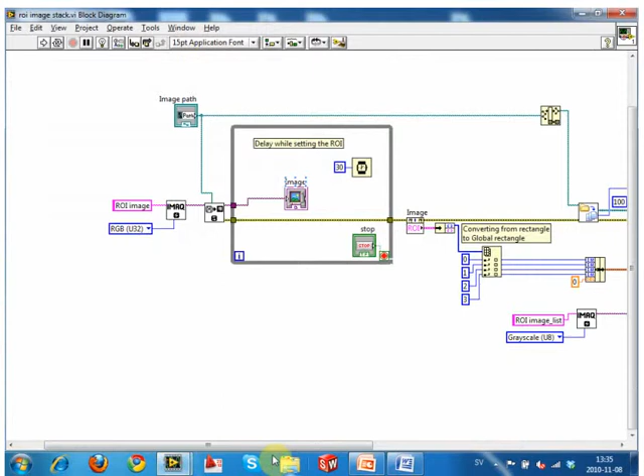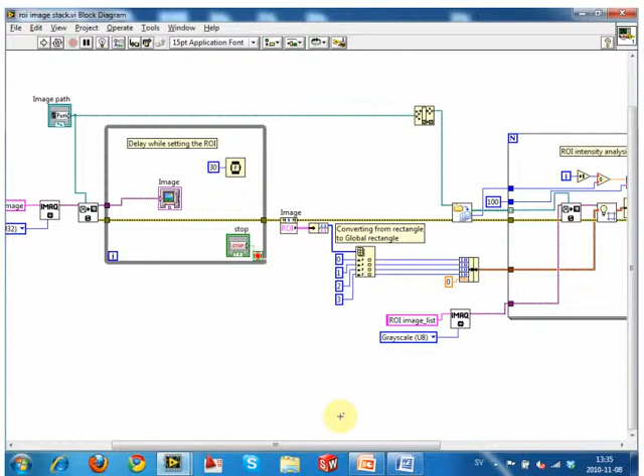So if we go into the block diagram, it's fairly straightforward. If we make reference to the block diagram from the handout, you see there's a few differences. The one in the handout was for image preloader, which is a little bit more advanced, and what we're going to work on today is the ROI one that was written in this particular section.

So, to start off with, we can straight away make two changes that are very important. One is this one - we're using this old, busted kind of VI, and we don't want to use that. We want to put in the one that we wrote, the one which does all the sorting for us and takes care of all these issues.

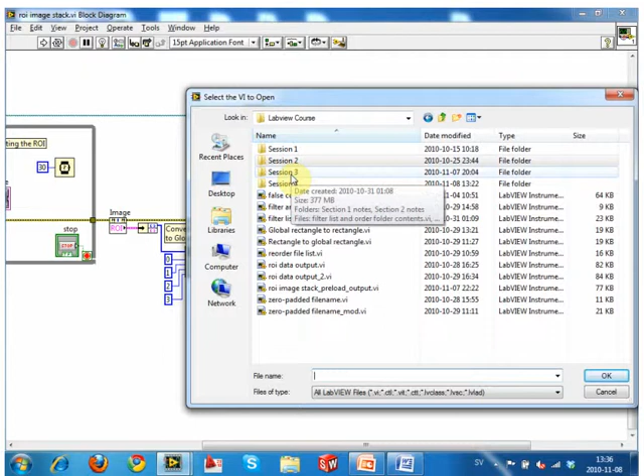So the way that we do that is we right-click on here, and we go to Select a VI, and then we want to choose the VI that we want to put in. And for assistance, I put them all in a folder called sub-VIs in session 4.

Sorry, it's okay, I missed a lot of lectures. Do you think I can keep up? Sure, you can just watch and see how it's going.

Okay, so then we need this filter list and order folder contents. That shows up on our diagram, and we want to just replace it for this one.

So we have the file path in, file path out, just like there is here. There's the error in. We also have this filter pattern, so we want to put that on the front panel as well, so that we can choose the JPEGs instead of just letting it run.

Can you tell me with one sentence what you are doing? So essentially, we're taking something we did from session 2 and making it more complex. We're building on something we've previously done and giving it more features like file outputs, and we're also going to introduce more sub-VIs to make things work a little bit better.

Okay, so we want to feed this through, so we can grab our wire, connect the input path, delete the old one, and put our ordered path into this one. Same thing with the error lines - we can flow the error lines through here too.

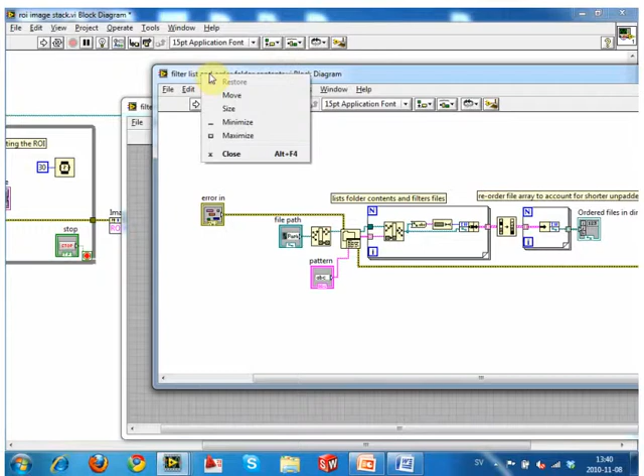So we've now replaced it with this VI that we wrote, which, if we open it up quickly, you'll remember we're taking the folder contents and reworking them. We're doing this little switcheroo to convert between old Windows format ordered files and files formatted the way that we want them.

So we've replaced that one. You'll also notice this thing, and I've mentioned previously that we convert types of rectangles from global rectangle to rectangle very regularly. It's something you kind of have to do when you deal with regions of interest. So we actually have a sub VI for that.

So if we drop another sub VI, right click and go to select a VI, and then go to global rectangle to rectangle, and then hit OK, then you should have this one. So this is actually written wrong—this is me writing it wrong. This is actually rectangle to global rectangle. Oh, global rectangle to rectangle, I apologize.

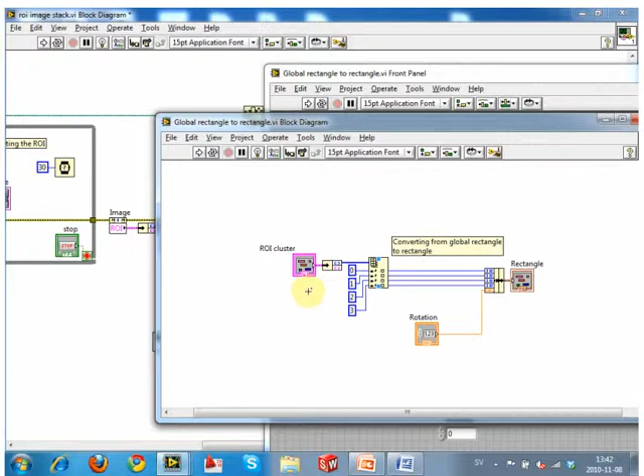Okay, so this is just for our own visualization issues. But what we're doing here is, if we double click, we'll see exactly what's within this sub VI. It's nothing more complex than what's already written on the screen, other than we have no need to write this every single time we want to call it—it's a common function. So that's why I put it in a little sub VI that we can just use whenever we need to do these regions of interest.

Why this time do you have rotation? So if we look over here, it always requires this rotation parameter. We can't get away with that, so we always have to input it. And the reason why it's not set to 0 in the back is just in case you have an example where you want to rotate it. And you don't have to edit the sub VI to put a rotation angle.

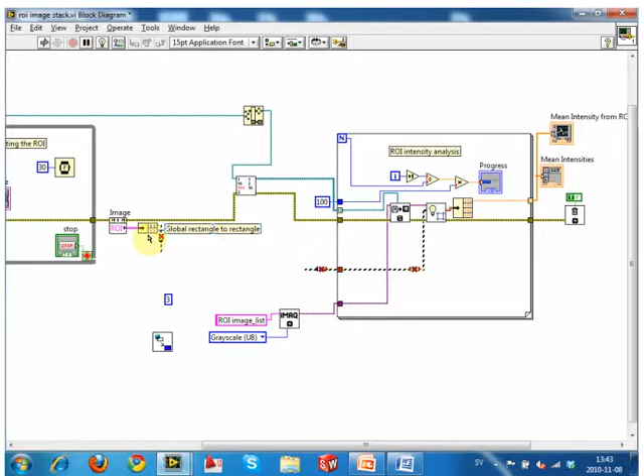So we can trash all of this now. We can just go ahead and bin all of this, because we have it all here. In fact, I'm going to get rid of all the broken lines. What was the control? Control B. So get rid of all that stuff.

So now what we're going to do is feed this wire, and it should even highlight, and it should be set. I've set these to the right names, so it says ROI cluster—that's what you feed in, and then you feed out the rectangle, and then we connect that to the rectangle of the light bulb.

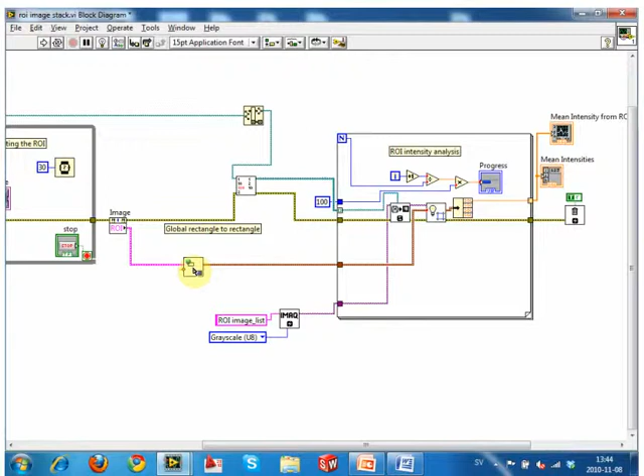Okay, but now, how do you choose the region of interest in the first place? No, this is all just switching numbers. You're choosing the region of interest actually on the image, so in here.

So once we have that, we have to put this rotational parameter too. So if you just right click when you've got it highlighted, go to create constant, and it'll default to 0 because that's what I set it to. And that's all we need to do. Now we've just replaced that whole pile of lines with this because it's nicer.

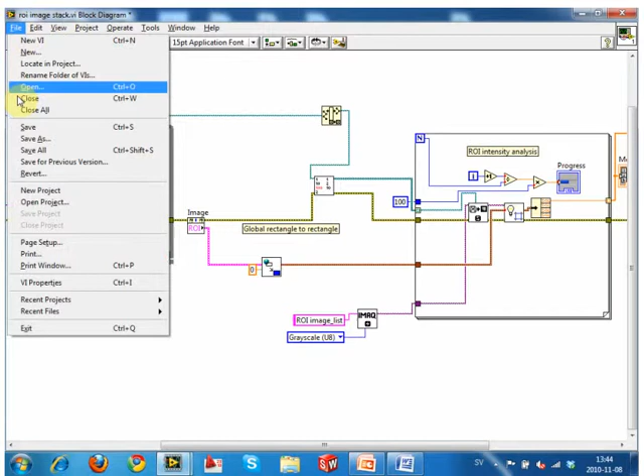Is there any other kind of improvements that we can make at this point? I don't think so. So why don't we just go ahead and save this as something new. Just go to File, Save As. We'll save this in session 4, folder, section.

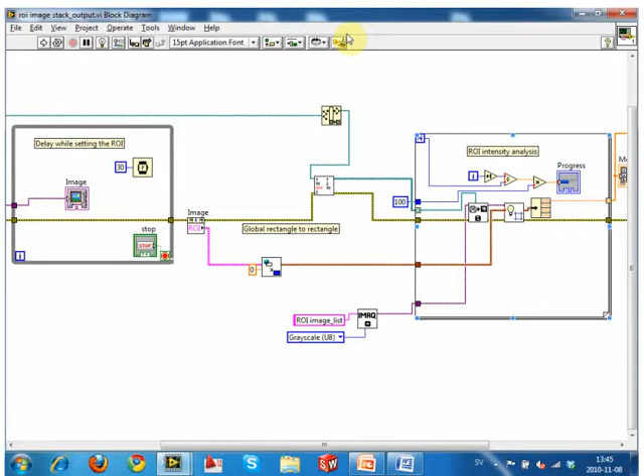I'm going to clean it up because I can. There we go. Okay, so we've simplified the diagram somewhat now by having these two new VIs.

What we're going to do next is get essentially an output. Right now we're getting this mean intensity value and just showing it on this graph. We don't want it to just be a graph, we want to get that data out. So we need to come up with a means of getting that data out.

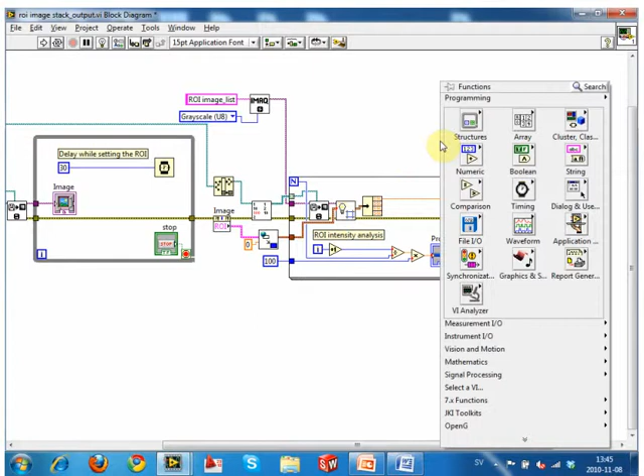Like I mentioned in the video, if you right click and go to File, Input, Output, you have a few options. This write spreadsheet is probably the most universal.

As I mentioned, what you class as a spreadsheet is probably different than what LabVIEW classes as a spreadsheet. LabVIEW classes as a spreadsheet anything where you put numbers. So text files, DAT files, XLS files, anything where it needs to have columns and rows, it treats as a spreadsheet, even if it's a single line of text. It still treats that as a spreadsheet.

You can output text files on their own. Because we're having a number string, we could output them as a string of numbers. But for better integration with programs like Excel, it's better to keep it as a tab delimited format, which is one option that we have.

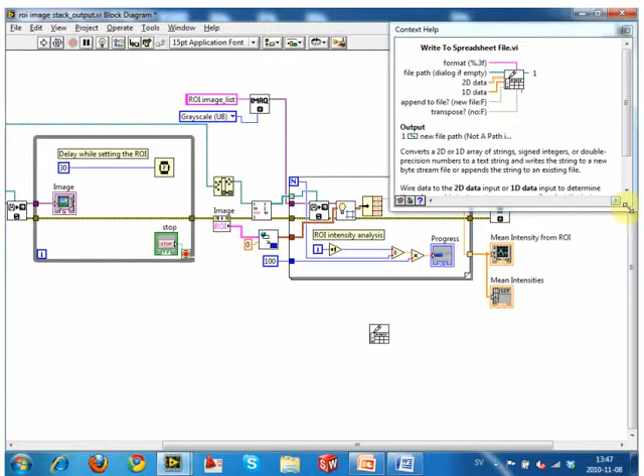If you hover over these things, or go to the help menu, it gives you some information about what it can do. They can also do all kinds of transpose functions and things like that.

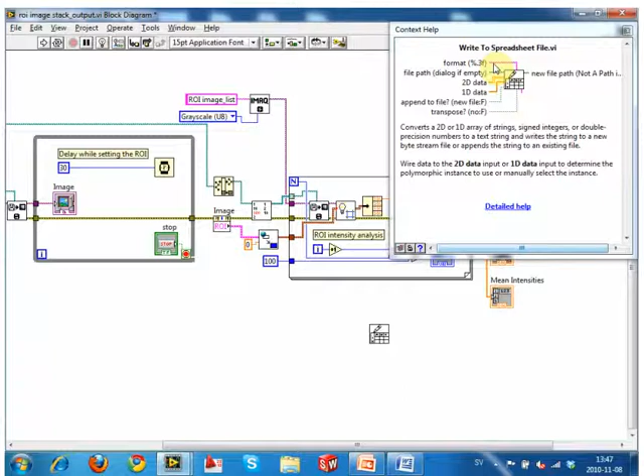But the thing that's most important is this formatting string on top, because that helps it decide what it's going to put the data as, whether it's space delimited, tab delimited, whether you want full stops between each of the elements, or commas, or colons. Depending on what program you're putting it in, depends on what format to put it in. If you go to the detailed help, it'll give you an explanation of what string to put in there.

Its default is tab delimited, so we just let it be the default because it works pretty well. We don't actually need to wire anything into format. And like I mentioned in previous sessions, only the bold items are necessary. In this VI, you'll notice there aren't any bold items, which means this VI will be perfectly happy not making it do anything.

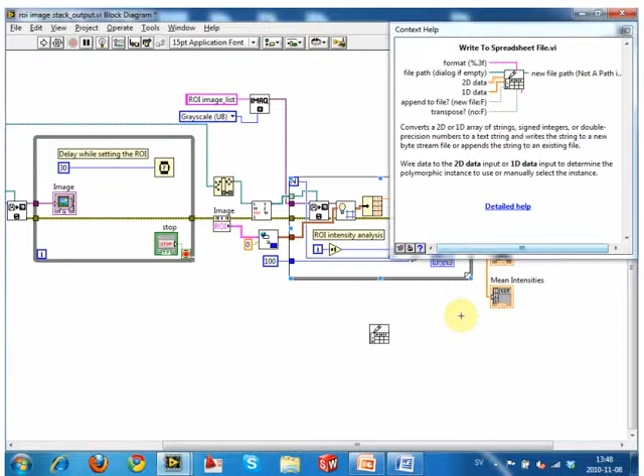Some sub VIs are like that, they have zero dependency, so this VI will run right now without any input. It's not very useful because it's not saving any data, but it still can run.

Are you recording this? Mm-hmm.

Okay, so we have this spreadsheet file, and we want to get some data into there. Instead of just having the mean intensity, because we're measuring all the others, like the standard deviation, the minimum, maximum, etc., we might as well get it all.

Save all the file, and then if we don't need it, we've got a choice later on, we don't have to go ahead and reanalyze anything. So what we want to do is package all of this together and then feed it into this.

So with this spreadsheet, and with a lot of things that are file outputs, they don't like clusters so much because they can contain any data type, so it doesn't really know how to handle it as an output.

Arrays can only have one type of data, so if we put them into an array then it knows, you know, if it's displaying text or numbers or pictures. So what we need to do is grab all of these from the cluster, put them into an array, and then feed that array into the spreadsheet.

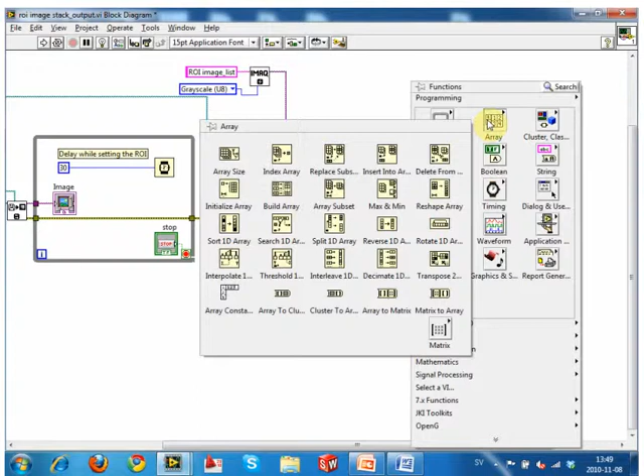So we'll make a little bit of room here, just grab the box up, and then right-click, go to Array, and then we go to Build Array.

If you drag down this little tab, we can put 4 elements in, because there's 4 elements here, we want to capture them all. Then just wire them all over: first one goes to the first one, second one to the second one, third one to the third one, fourth one to the fourth one.

I'm sorry? I'm not good at this kind of thing. Every time I think it's okay. That's fine, no problem.

So can we add the title for each column? I mean, in the text? Yes, it's a little bit more complex.

So what you need to do is build an array. This will build an array, and it will give us this whole array of numbers. It'll be a 2D array, it'll have the different types, and then down it'll be each of the files.

So once we've built that, we essentially need to append the array, add something into it. So in that case, we would need to build a separate array of the same width.

So like a 4 array, but it'd have to be a text-based array. And then with that array, we'd add that, like we'd add the arrays together. It's very possible, and I can show exactly how to do it, but it'll take me like 15 minutes to show you. So I'd rather just do this, and maybe next time I'll show you how to do that. It's not a big thing, it's totally doable - you just build a separate array, and then add the arrays together.

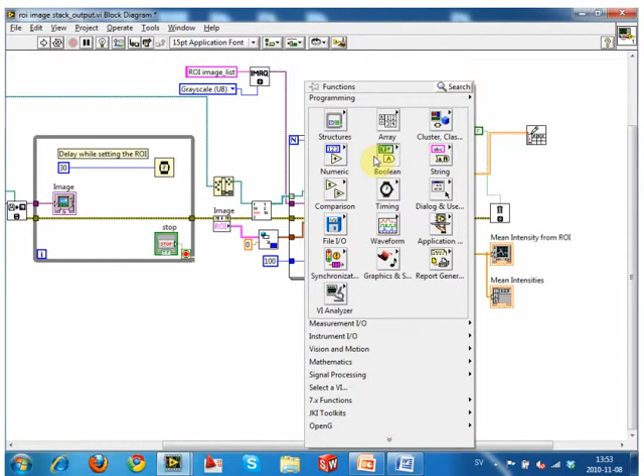What we want to do then is go to the file palette. So if we right click and go to File Input Output, and then we want to build a path, and then put that somewhere, doesn't matter where. Then we're going to feed this path into the dialog.

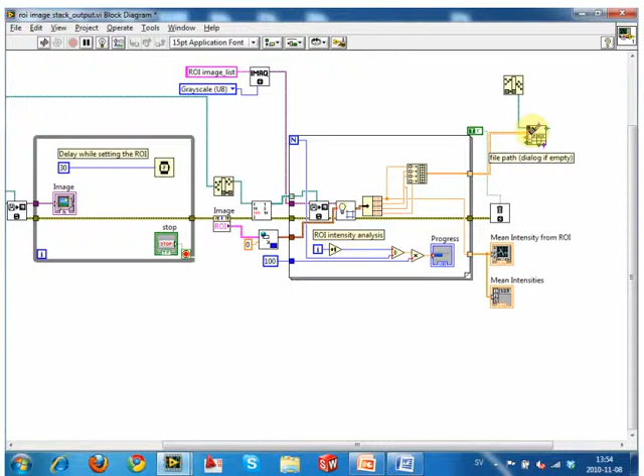So now we have to decide what name we're going to use. You can let people choose it, etc., but it's easiest just to use a constant. So right click, go to create constant, and then we just type something - let's call it, I don't know, data analysis.txt.

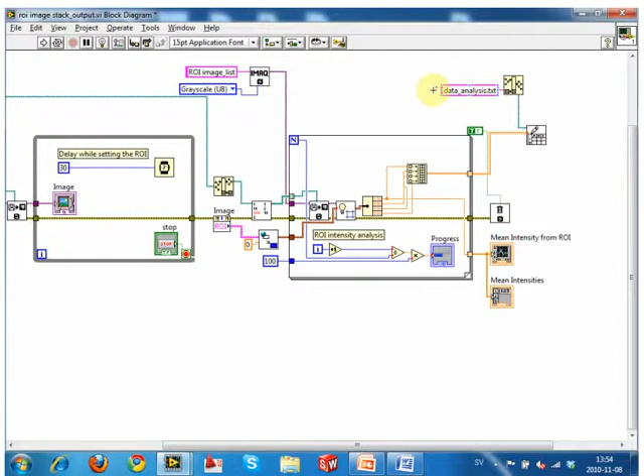Now we need to also state where it's supposed to go. So we know the file name, but we have to add the rest of the information. One of the easiest places to put it is where the file was to start with, so we want to put it in the same folder. If we look back across our VI, we chose the file here - we chose a picture - and then we stripped this file off, we stripped that path off to indicate the folder, because this analyzes the folder. So what we want to do is use this path here and wire it over there.

Okay, and there's one other thing, guys, just to keep everybody on their toes - or that I just made a mistake - this one is actually wired to the wrong point. You would notice it as soon as you started. You should always flow back things.

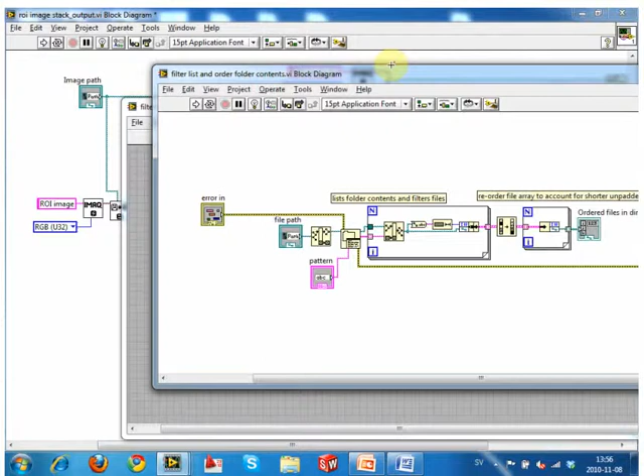To make things even simpler when using this VI, you don't have to strip the path. So if we double click and look at what this VI is doing, we're selecting a file and pulling the path off the file. So we're selecting the path and pulling it here - we don't need to pull it off both sides. So instead of wiring this into this section, what we're actually supposed to do is wire it into the parent folder.

So just to explain again, this chooses the image, and then we strip the file name off to get the folder name. That's what we use so we know where to write the file. This image sorting sub-VI doesn't look at the folder name - it wants to take care of everything for you. We're trying to make it as easy as possible. So all it wants is to be pointed towards the image - you just point that towards a particular file within that folder, and it takes care of the rest.

So let me have a little look. So this one, well, let me clean up this. Oh, it is clean. How's that? Oh, no, I can't.

That's good. Okay, so right now we're stripping this file path. This becomes the folder, and you're feeding the folder into here, and then adding this file name to it, which is giving us out, which is what we want.

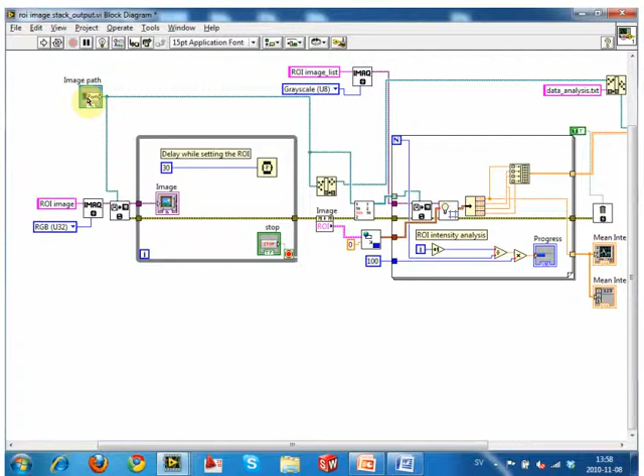So to use this sub-VI, you just have to wire in a file, and then it takes care of the rest. So that's what we want to do, make it as simple as possible, but to do that, we have to wire it. Okay, so now, let's just clean up again, so we're a little bit clean.

Now we're writing this data output file. This file is now being outputted. I'm going to try this, because we don't like this.

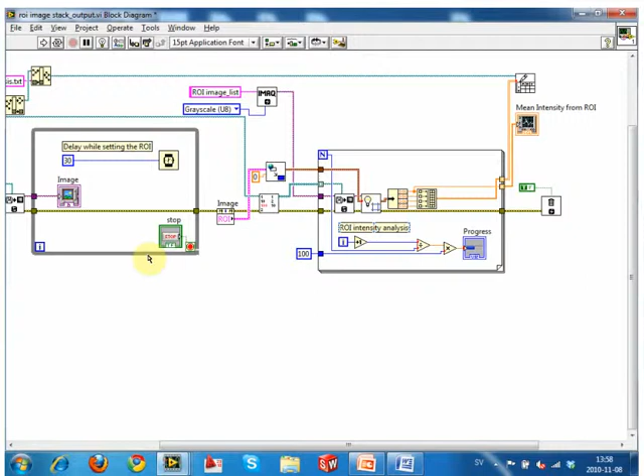Yeah, we're all kind of on the same page. We kind of get that we're making a text file with all of these bits of information in it. Yeah, okay.

Do you have any data on your computer that you can analyze? Yeah, okay, so I'll just first of all check to see. I imagine I still have my results from the last run. No, no, no.

That one. Okay, so in this folder I have two different file types. I have bitmaps and I have JPEGs. Okay, and one thing that we need to do on this front panel is allow us to select for that.

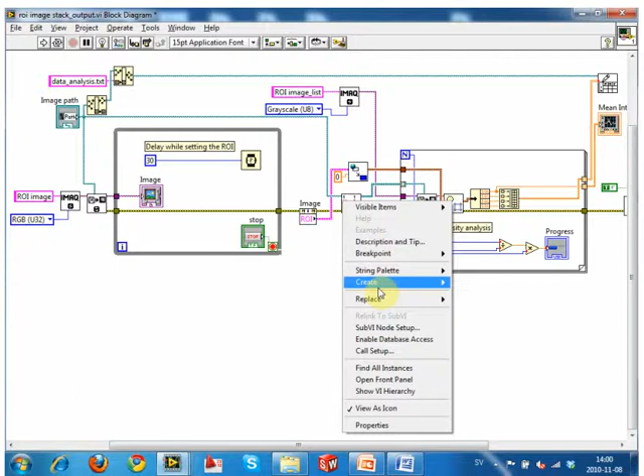So if we right click on that one, we'll actually want this as a control, so we can type this on the front panel whenever we want to. So where did that go? It went up here, okay.

So what we want to do is say, okay, we want to select all JPEGs only. So that's the pattern that we want to use. What do you do, right click? Yes, right click and then create, control.

Okay, so we're not highlighted. So, yeah, no, you have to be over it, yeah, now right click. Now go to create, control. Okay, now go to the front panel. Okay, it should be up here.

And we want to give that just a pattern star.jpg, so that we're just selecting for the JPEG files. In my folder, as an example, there is just as many bitmap files. We don't want those analyzing. There's a whole bunch of other files. We want to select just JPEGs. Okay.

So we want to, well, first of all, save it so we don't lose anything. Click on your little folder thing and point to the right folder. And for us, it's in this Point Grey camera control thing. Experiments, select two. This one, we choose a file, doesn't matter which. Let's choose this one.

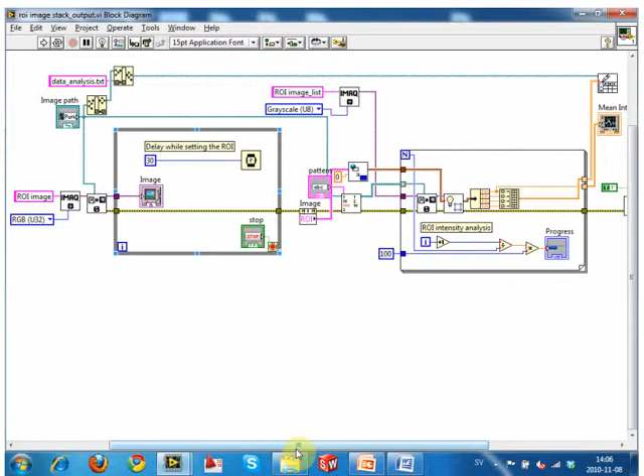If you go to the block diagram, you're essentially measuring that. So if you... well, for right now, I'll just make you an indicator. So you have a rectangle, then it's telling you x1, y1, x2, y2.

But my example is, for example, this is the patch of lipid. As time goes by, it's enlarged. I want to know how the area changes. That's got nothing to do with region of interest directly—but we can choose the area like this, not a very small one, and we hope to measure how many pixels of the fluorescence, for example.

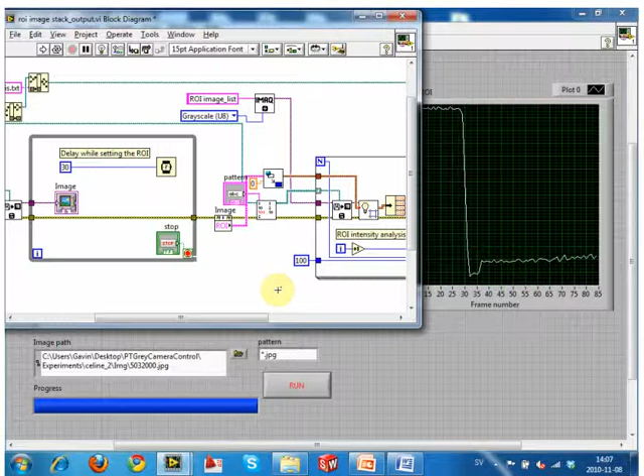No, you can't do it like that. We cannot do that. We can only get the whole pixels, not that specific measurement. You know what I mean? I know what you mean—you wouldn't do it anywhere near like that. I can go through it separately with you; it's a totally different analysis. You'd measure it—it's very doable and quite easy to do, but it's different, a very different analysis.

Okay, so we did this and got a little graph, yeah? Yeah, you got a graph too. So now if we go to that folder where the images are, there should be a text file somewhere. Let's make this a big list. Yes, there it is.

Yeah, you can do that—you just have to add the arrays together. So that's what they are, because we wired them in that order. Did you get a note? Yeah, so that's all it is.

We outputted this analysis file. We don't have time to go into it, so those watching can hopefully watch the second video for how to change the color and output some files. It'll be touched on again next week when we make videos, as well as the images, so it'll be brought up again in both sessions—but for those interested, you should watch the second section because hopefully we'll cover it there.